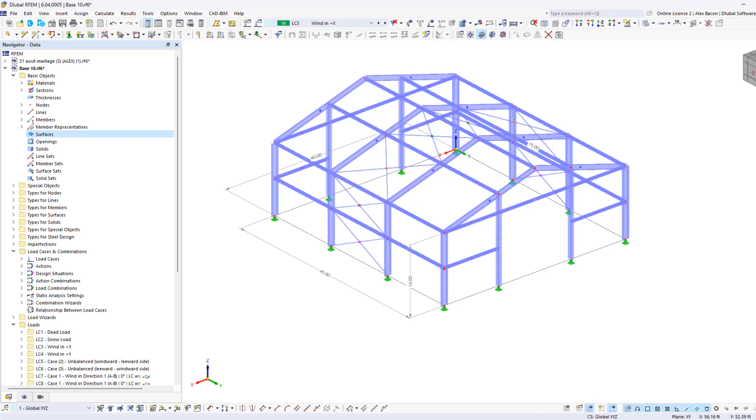A new and very helpful function in RFEM 6 is the load transfer surface. For the side walls, we can use the rectangular surface. In addition to the load wizards, you can use load transfer surfaces to easily generate loads in RFEM 6. We create this new rectangular surface using the load transfer stiffness type. This is unique and has no structural effect and can be used to consider loads from surfaces that haven't been mounted.

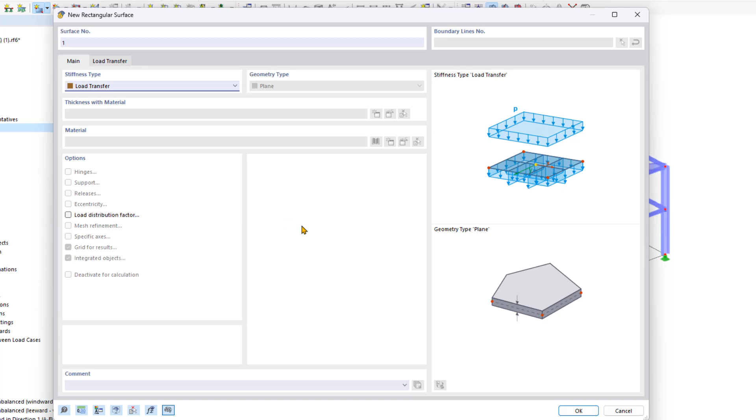In the Load Transfer tab, this is where we can select both directions for load transfer direction, and then we can click OK. For the rectangular surface, all we need to do is click and confirm 2 points. To insert the surface on the front of the structure, we want to use the Select Boundary Surface tool. Again, we choose Load Transfer in both directions. To insert this new surface, we select the boundary lines of the respective surface.

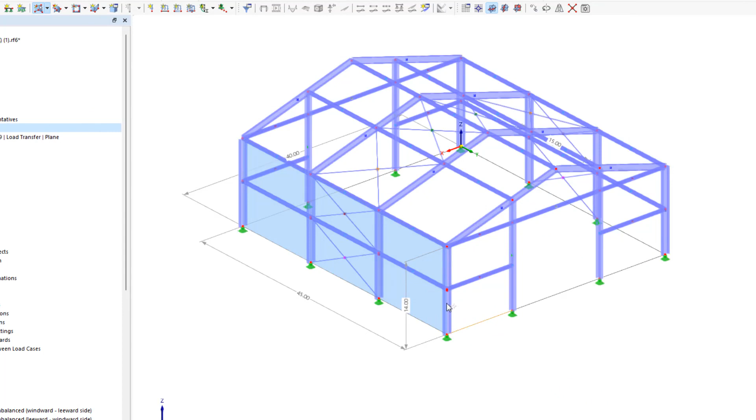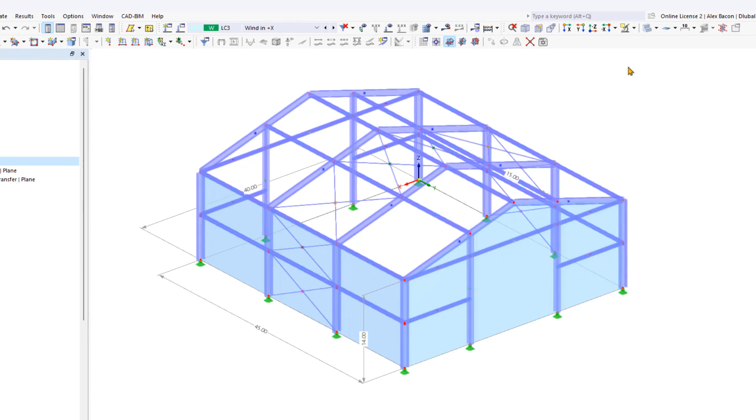If the boundary line consists of several members, we select them one by one. Once all boundary lines of a surface have been selected, the surface is created. Then we repeat this process for all lateral surfaces of the steel hall. We can also use the wireframe view to select the lines more easily. Once we've inserted 2 of the lateral surfaces, we can save time by holding down the Control key to drag and drop them to the other side.

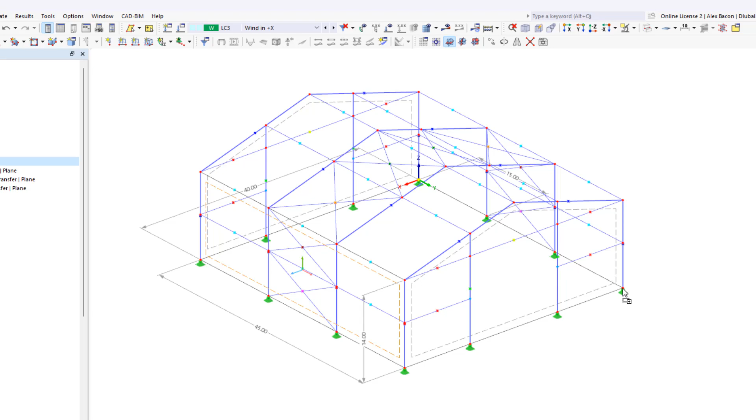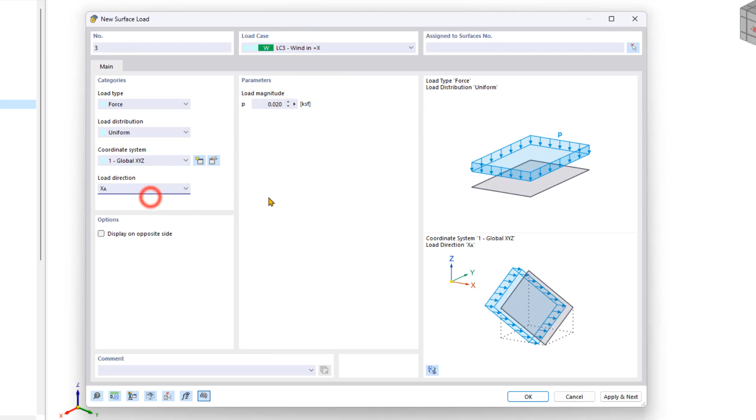We have inserted all of the load transfer surfaces, and now by right-clicking on a surface we can display the local coordinate systems and customize the properties of the load transfer surfaces. Now let's set the wind load in the X direction by clicking on the New Surface Load button. In the new dialog box, we select the correct load case from the list and enter the load properties. Then we click OK to apply the load to the surfaces. We repeat this process for the Y direction as well.

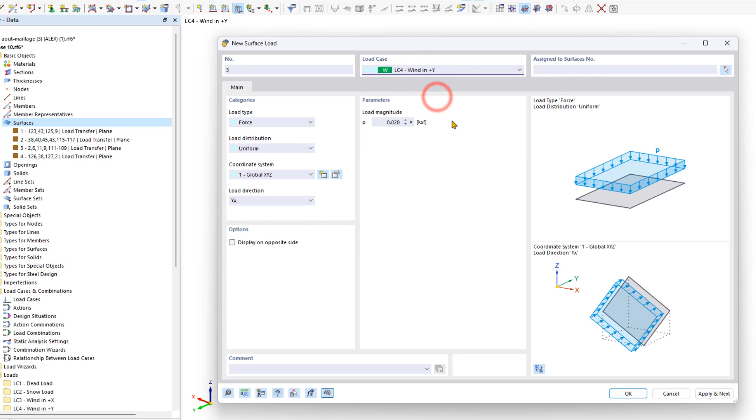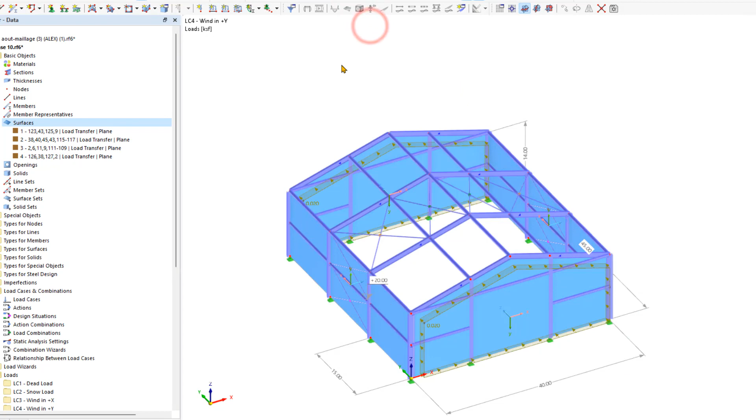We can also customize these loads after the fact. For the suction side, we want to decrease them. In our example, we've entered the wind loads for the roof and the sides of the steel hall in separate load cases. These loads act together from the same directions. We've also assumed that we cannot automatically generate these wind loads on the vertical walls using the load wizard.

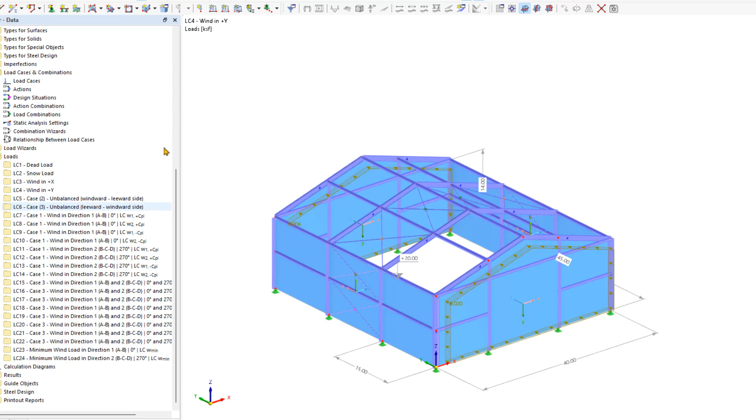To consider this interaction, we select the lateral wind loads in the navigator and add them by right-clicking on the respective automatically generated wind loads of the roof. Just for example purposes, I will only be adding the wind load to one of the automatically generated wind load cases.

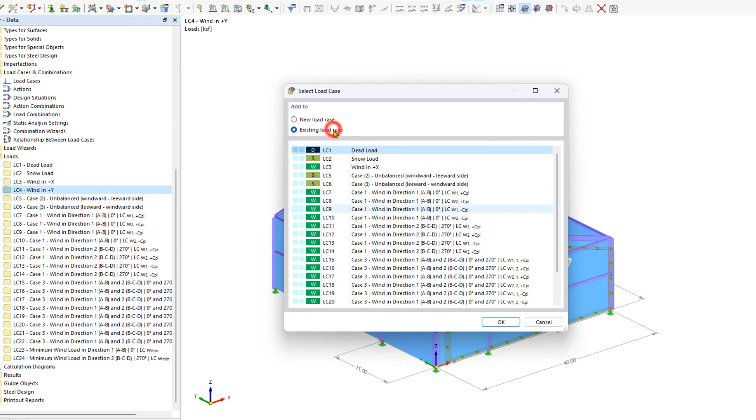So far, this is how you would manually add the lateral loading for wind loads to the side walls and vertical walls. But I would also like to show you how you can use the wind load wizard tool to automatically generate the loading for the vertical walls. I'm going to go to load case 23, our minimum wind load in the X direction, and delete the loads that we have added manually. Then I will do the same thing for load case 24.

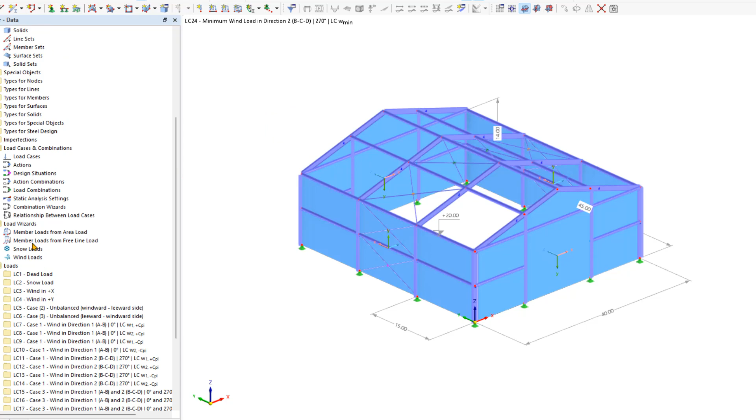Now to have the wind loads automatically generated using the wind load wizard tool for the vertical walls, we can go back under load wizards and then under wind loads into our automatically generated wind load wizard. Under the submenu type, instead of choosing duopitch roof, we can choose vertical walls with duopitch roof. As you can see, now we must enter the base corner node numbers, I, J, K, and L.

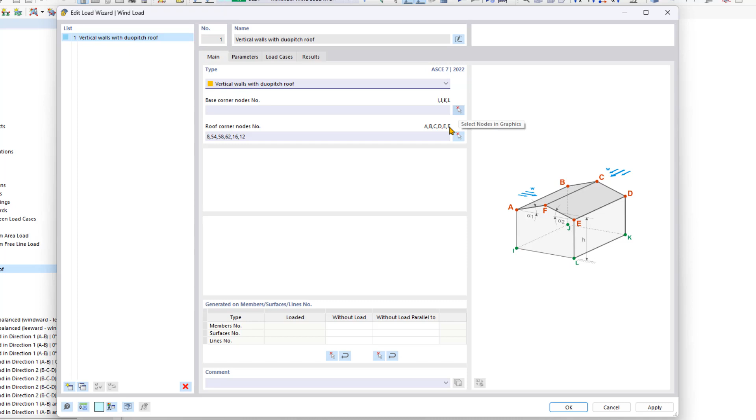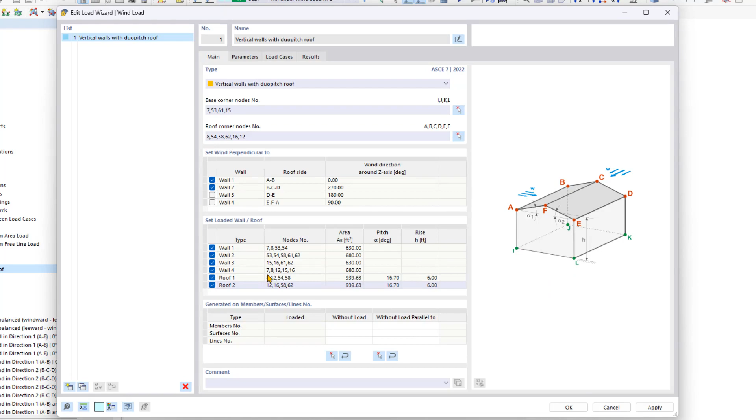We need to make sure that I, J, K, and L match up with the same order of operations that we have chosen the nodes for A, B, C, D, E, and F. We can choose these graphically using this button right here. I will start off on the same corner that I've chosen A in the previous video. Now, as you can see, we have our set loaded walls down here in the table below.

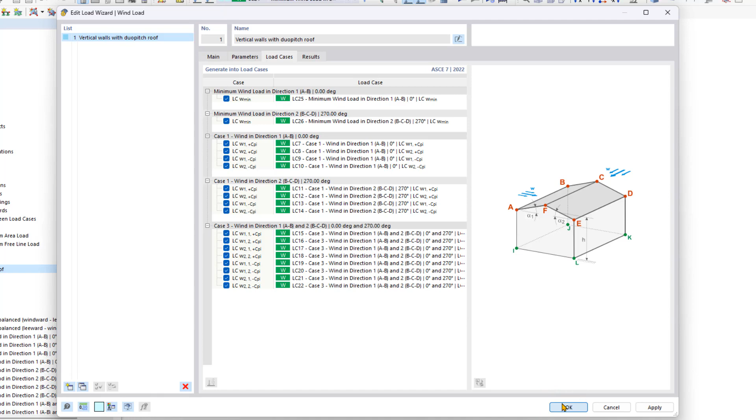Under load cases again, we want to uncheck our manually created lateral loading, check them back on, and then have the load wizard generate these load cases automatically. Now we can click OK. And now the loading on our walls is automatically generated for our wind loads. We do have extra minimum wind load cases now, so we can now just easily delete load case 23 and 24, holding Control, selecting both of them, and hitting the delete key on our keyboard.

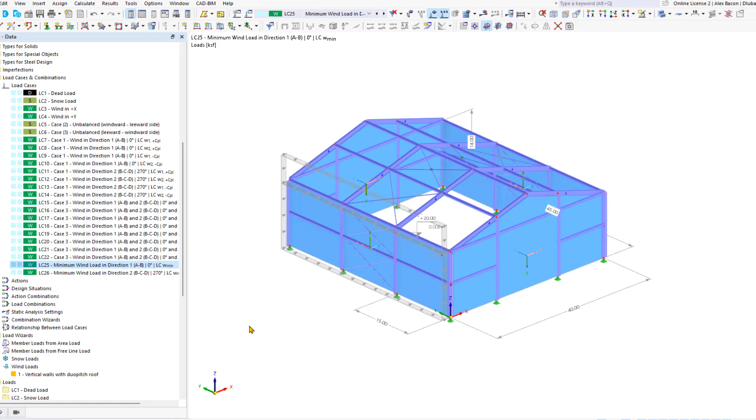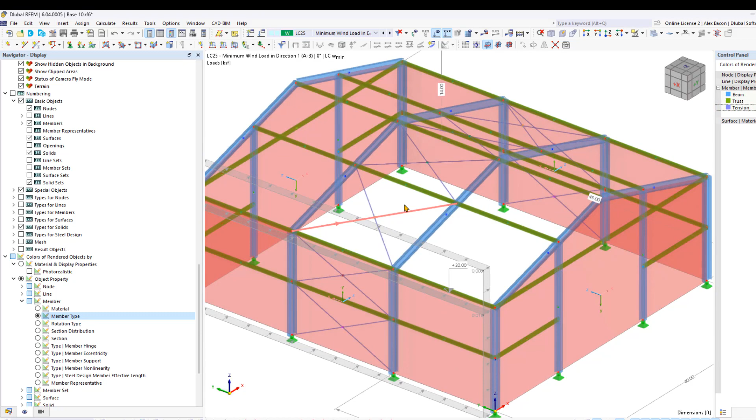For member structures, ensuring structural stability is crucial. Stiffening bracings can receive compressive forces, and if these are tension members, they fail automatically when absorbing compression forces. We can go to our Display tab, and under Colors of Rendered Objects By, we can go under Members and choose Member Type. In the control panel on the right, you can see tension members are red, and you can see that our cross bracing is set to tension only. These members will fail automatically when absorbing compressive forces.

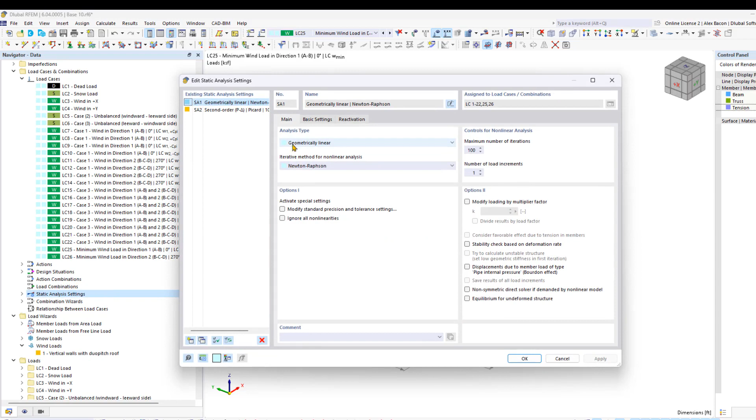To avoid this instability, you can activate the Exceptional Handling option in the Reactivation tab of the Static Analysis settings. Alternatively, you can assign a very low stiffness to the failing members or apply pre-stress to the tension members. This pre-stress ensures that tensile forces act constantly on the stiffening members, preventing failure due to compression forces. First, we need to create a new load case. This load case will be a self-straining force. With the self-straining force load case, we can insert a load on the tension members using an axial displacement.

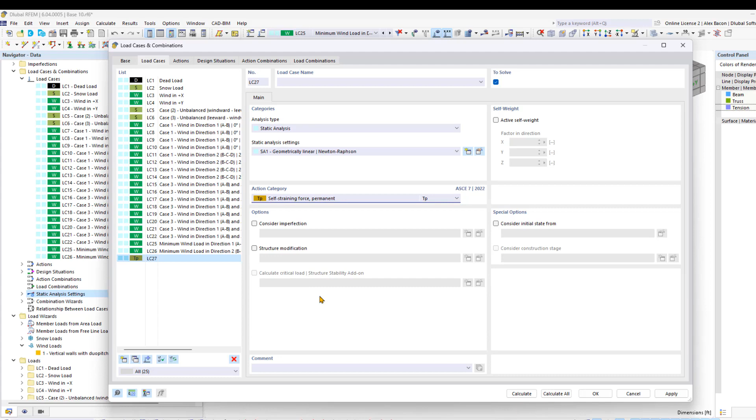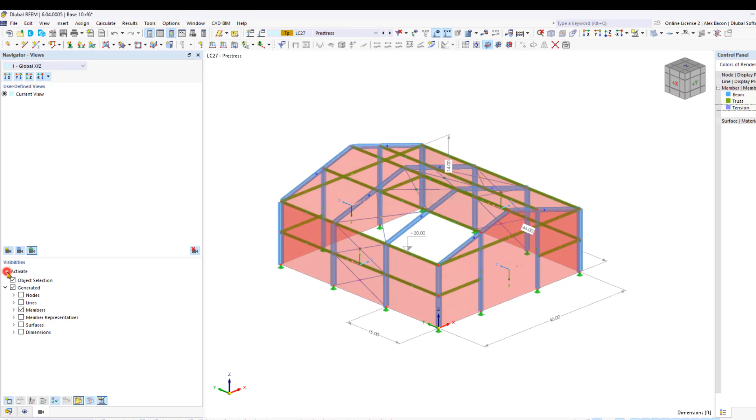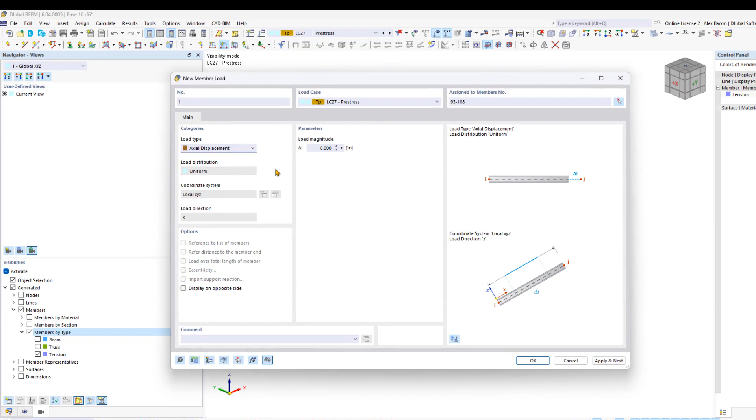We can also give this load case a name of pre-stress. We can select all bracings quickly using the visibilities. Under the Views tab, we can activate visibilities, turn on members, and sort members by type via tension. Now we can easily select all of our tension members and add in an axial displacement. We'll click on Member Load, change our load type from force to axial displacement, and then we'll enter a small magnitude of 0.5 inches. With these measures in place, we've ensured that no instabilities will occur during the calculation.

This concludes the final chapter of the loading of our structural analysis model. Now you have a comprehensive overview of the load cases, actions, combinations, and loads in RFEM 6. In the next video, we will begin the calculation.